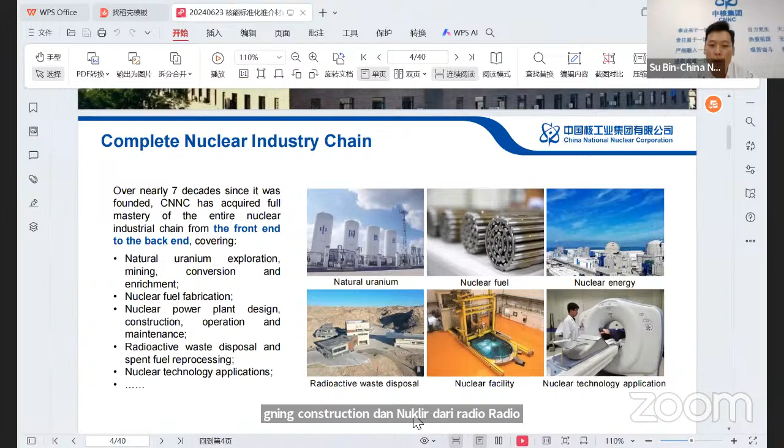For CNNC, as I said, it has a complete nuclear industry chain. Over the nearly 7 decades since it was founded, CNNC has acquired full mastery of the entire nuclear industry chain, from the front end to the back end, which covers natural uranium exploration, mining, conversion, and enrichment. Second is nuclear fuel fabrication and nuclear power plant designing, construction, operation, and maintenance. And also nuclear radioactive waste disposal, spent fuel reprocessing, and nuclear technology application in different areas.

For nuclear power development, as we stand as the first rank of nuclear group, CNNC has constructed many types of reactors from generation 2 to generation 4, including CNP300, CNP600, CNP1000, and HPR1000. You can also see the ACP100 and HTR-PM.

And the AP1000 - actually AP1000 is from American, it's Westinghouse, and we have also imported the American power plant, but now it's in China. It is still under construction.

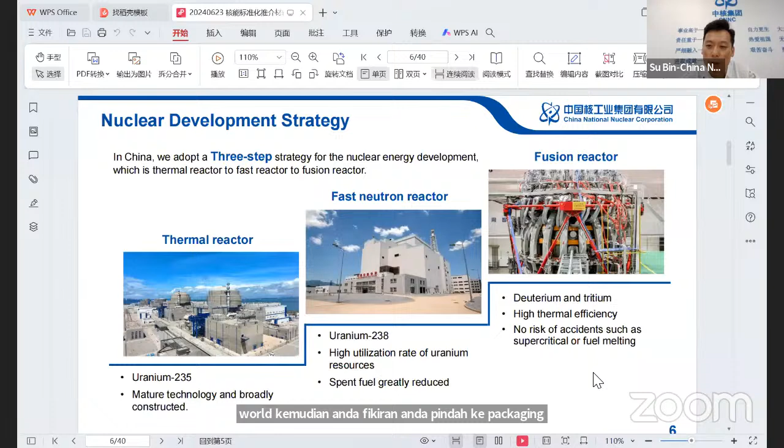Now come to CNOS. CNOS was founded on April 25th, 1983 in China, called China National Nuclear Corporation Overseas Limited, a wholly owned subsidiary of CNNC. It's the leading and designated platform specialized in overseas market development of a complete nuclear industry chain.

For CNOS, we can provide integrated solutions based on the nuclear industry chain of CNC. CNOS can provide life-cycle integrated solutions for overseas NPP. As you can see, CNOS is a leader and overseas EPC contractor, for both nuclear power and research reactors.

Under the leadership of CNNC, we have CNPE, an overall designer. We also have a supply company called CNEIC. After that, we have a specialized company for nuclear construction called CNEC. We also have an NSSS design company called NPIC, and our specialized operator and O&M services for nuclear power plants, called CNNP.

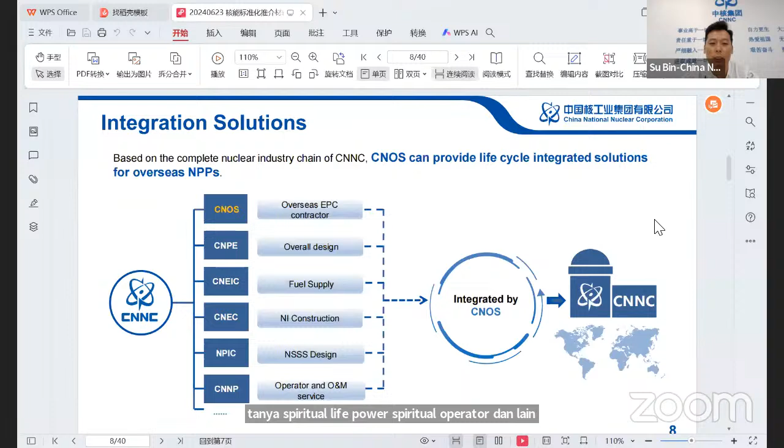Now I would like to share the overseas projects. Over the last 40 years, CNOS has successfully exported one research reactor to Algeria and 6 nuclear power units to Pakistan. We are also jointly building, with Pakistan, 6 nuclear power plants.

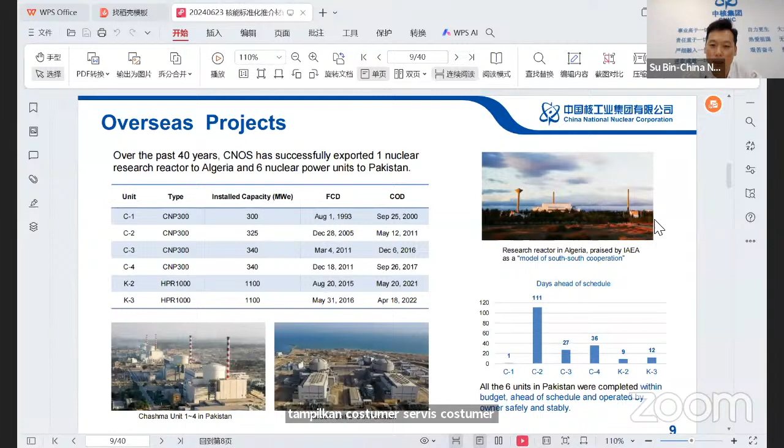Compare with this to see - all 6 units in Pakistan were completed within budget, ahead of schedule, and are operated by the owner safely and stably, meeting power demand with our delivery capacity.

For the design of HPR1000, almost 40 years of experience in design, engineering and operation has endowed us with HPR1000 - a safe, reliable, economic, competitive 1000 megawatt level PWR reactor technology independently developed by CNNC, with a combination of active and passive design concept. HPR1000 has completed the GRSR safety review of IAEA.

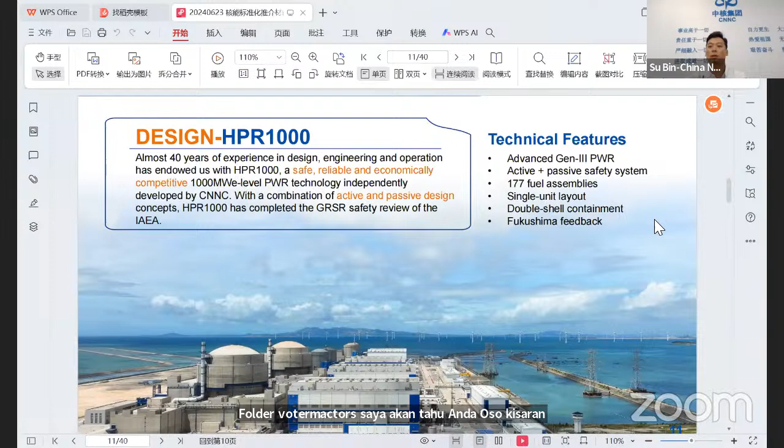For HPR1000, we have several technology features - it can be said to be an advanced generation 3 PWR. We also adopt active and passive safety systems. For the reactor fuel, we have 177 fuel assemblies, and we designed it in a single unit layout. For the reactor, we adopt double shell containment, designed based on Fukushima feedback. We have designed HPR1000 with the most advanced and safe design.

For the plant of HPR, you can see on my right side a picture of the Fuqing nuclear power base in China. We have successfully built the first third generation HPR1000 in Fuqing, called Fuqing Unit 5 and Fuqing Unit 6, in Fujian province of China.

For Fuqing 5-6, the installed capacity is 1161 megawatt. Design life is 60 years. Refueling cycle is 18 months. Availability factor is more than 90%.

For Fuqing 5, FCD was since 2015, and Fuqing 6 also in the same year. COD for Fuqing 5 was 2021, and Fuqing 6 in 2022. The construction period of Fuqing 5 is 68.7 months, and Fuqing 6 is 75 months.

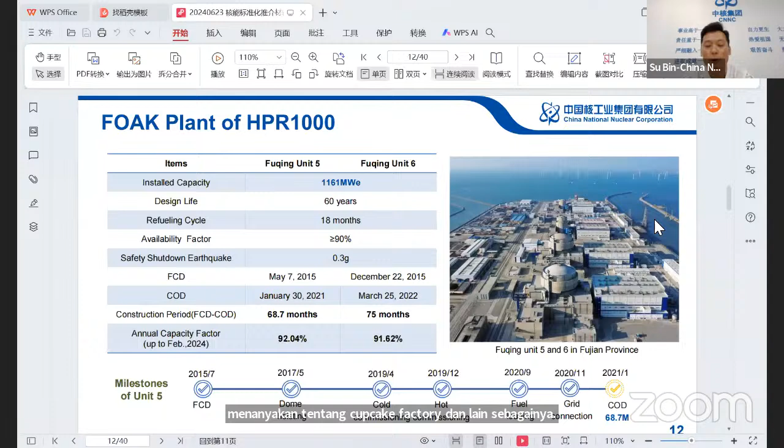The annual capacity factor of Fuqing 5 is 92.04, and Fuqing 6 is 91.62. You can see all the milestones of Fuqing 5 nuclear power plant in China.

After Fuqing 5, we have built another 2 nuclear power units which also adopt the same technology, HPR1000. Based on Fuqing 5 and 6, we have optimized our design and cost. For Zhangzhou Unit 1 and Zhangzhou Unit 2, we have improved installed capacity up to 1212 megawatt, design life is 60 years, and the refueling cycle is 18 months.

FCD time is 2019, and planned COD time is by the end of 2024. Zhangzhou Unit 2 will achieve commercial operation by October 2025. The construction period for both units has been reduced to 62 months.

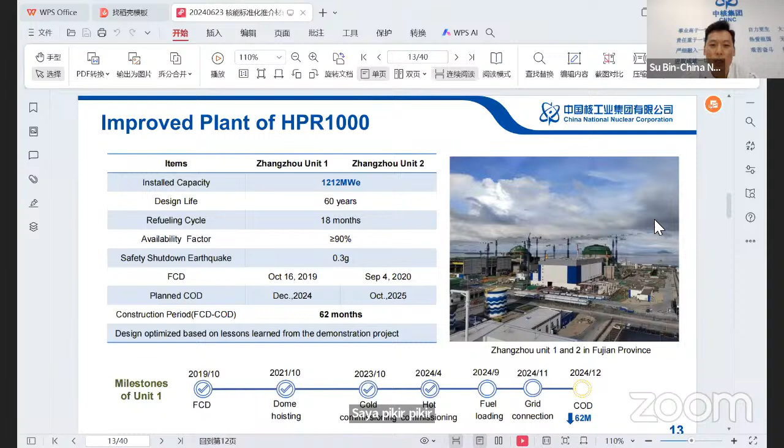Now we'll come to the overseas plants of HPR1000. The first 2 overseas HPR1000 units have come into operation in Karachi, Pakistan. And the EPC contract for another 2 HPR1000 units has been signed.

One is in Pakistan, in Chashma nuclear base, which we call the C5 project, with a design capacity of 1200 megawatt. Another one is in Argentina, Atucha Unit 3, and we signed a contract with Argentina on February 1st, 2022.

With overseas HPR1000 information, for 1 unit construction period we require 66 months, and for double units we require 87 months of construction period, from FCD to COD.

The unit capital cost of 1 unit of HPR1000 is around 4,500 to 5,500 US dollars per kilowatt. For 2 units, we can slightly reduce the cost, which comes to 4,000 to 5,000 US dollars.

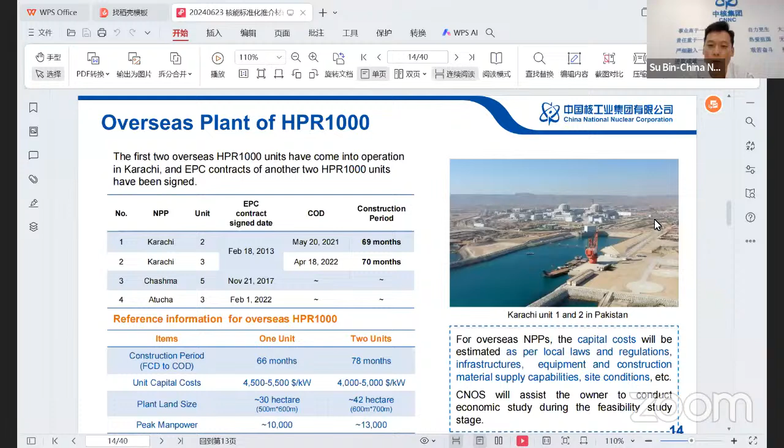Now we'll come to the design of HTR. The pebble bed modular high temperature gas cooled reactor, which we call HTR-PM, is an advanced nuclear reactor with characteristics of generation 4 nuclear power technology, with independent Chinese intellectual property.

Currently, regarding HTR-PM advanced reactor technology, there is cooperation between Tsinghua University in China and BRIN. Under the support of both governments, Tsinghua University and BRIN have established the HTGR-PM Research Center in BRIN, in Jakarta.

For HTGR technology, we have several features: inherent safety, online refueling, multi-applications, and modular design.

The characteristics of HTGR-PM: it's a helium cooled, graphite moderated reactor with fully ceramic coated particle fuel elements. It's featured with low power density, controlled reactivity, and confinement of radioactive material.

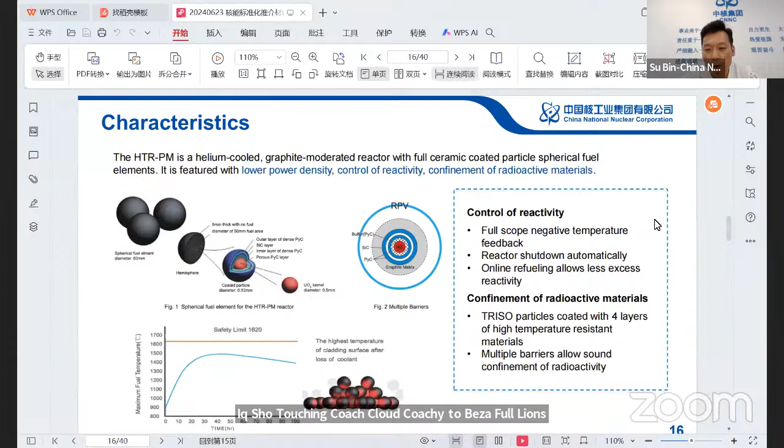For confinement of radioactive material, TRISO particles are coated with 4 layers of high temperature resistant material. Multiple barriers allow sound confinement of radioactive material.

For the plant of HTR-PM: in China, we have built the first fourth generation nuclear power plant, HTR-PM, our demonstration plant. This first demonstration plant in the world has successfully entered commercial operation in Shandong province, China. The installed capacity is 210 megawatt.

Coolant helium pressure is 7 MPa. Reactor outlet temperature is 750. Main steam temperature and pressure is 541 and 13.9 MPa. Design life is also 60 years.

Applied for power generation, we got FCD from 2012 and commercial operation in 2023, with a construction period of 132 months.

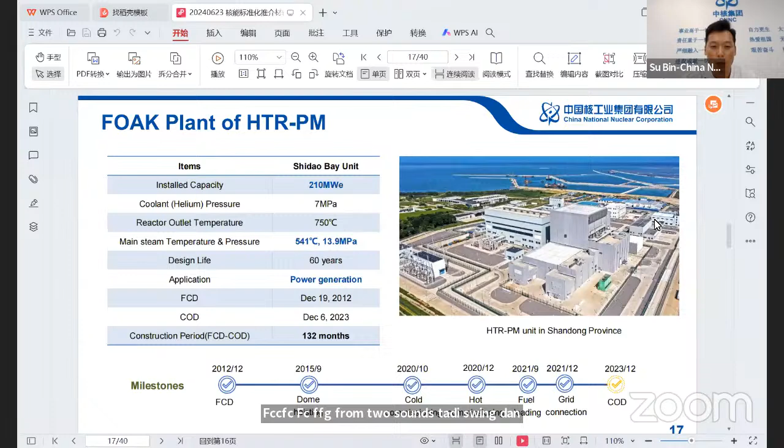And petrochemical comes to the HTR-PM600. We have successfully linked petrochemical couplings. The demonstration project, Lianyungang Nuclear Steam Supply Project, for petrochemical couplings, plans to supply industrial steam to the Lianyungang petrochemical industry base. We can see that the project plans four units at HPR-1000 plus 2

HTR-PM600. In phase 1, we plan to construct 2 HPR-1000 units plus 1 unit HTR-PM600S. The phase 1 steam supply is 4,000 tons per hour, and thermal utilization rate is more than 85%. Planned FCD is December 2024. You can see this is all detailed information.

For the HTR plan, single unit construction time is 48 months, and the unit cost is 6,000 to 7,000 US dollars per kilowatt. For the HTR-PM600, construction period is 60 months, and the cost compared with HTR-PM is slightly reduced, coming to 5,000 to 6,000 US dollars per kilowatt.

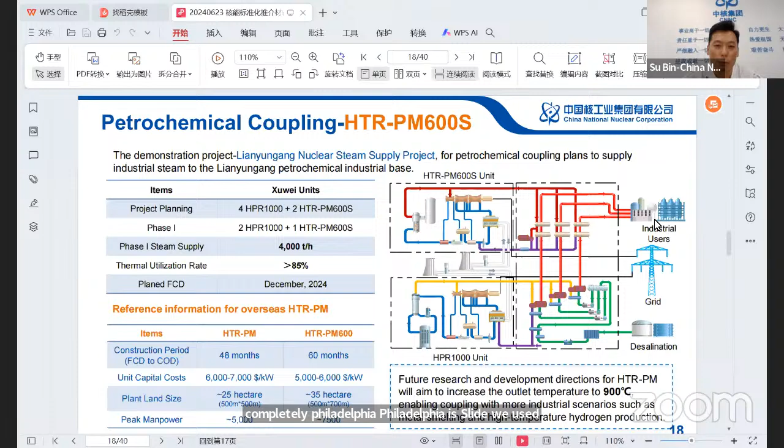And for the design, now we are coming to the ACP100. It's a small modular reactor design. The ACP100 is a new generation of small and elegant NPP developed based on inherent mature technology, aimed at broader users and featuring easy connection to

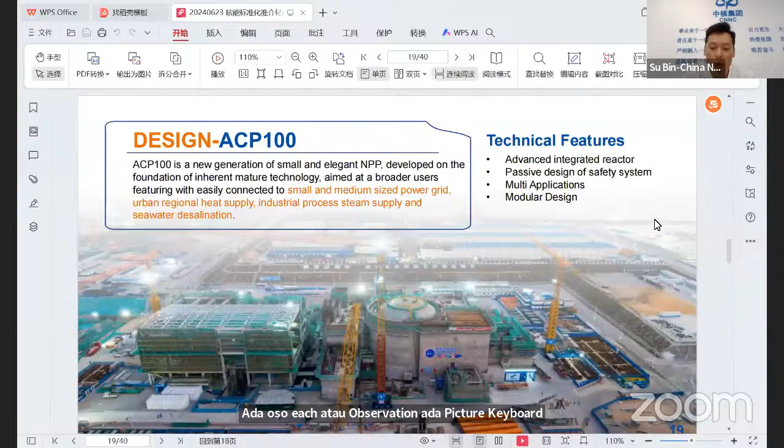small and medium-size power grids, urban regional heating supply, industry process steam supply, and seawater desalination. For the ACP100, we have several technical features: advanced integrated reactor design, passive safety system, multiple applications, and it also adopts modular design. The picture shows the first SMR reactor developed,

under construction in China, Hainan province. The characteristics of ACP100 are adopting integrated reactor design technology along with a passive safety system, incorporating comprehensive measures for preventing and mitigating severe accidents. For the SMR integrated design, the canned pumps are connected to the reactor pressure vessel, once-through steam generation, and integrated reactor internals design.

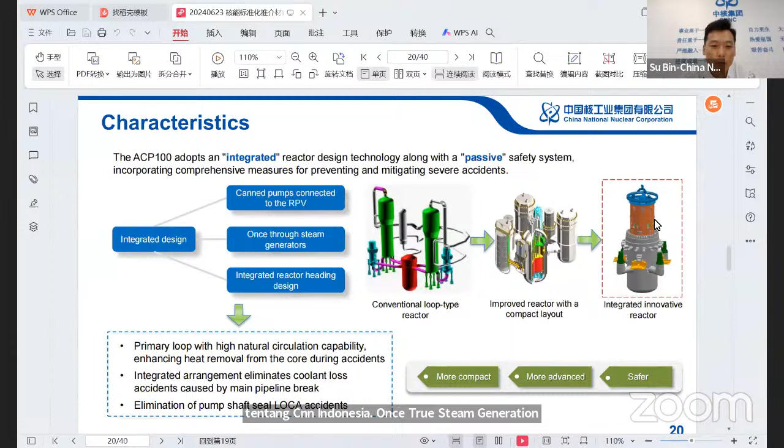For the ACP100 plant constructed in China, located in Hainan province: installed capacity is 125 MW, design life is 60 years, refueling cycle is 24 months, availability factor is more than 90%, safe shutdown earthquake is 0.3G, construction start was 2021, and planned COD is end of 2025. Construction time is 53.5 months.

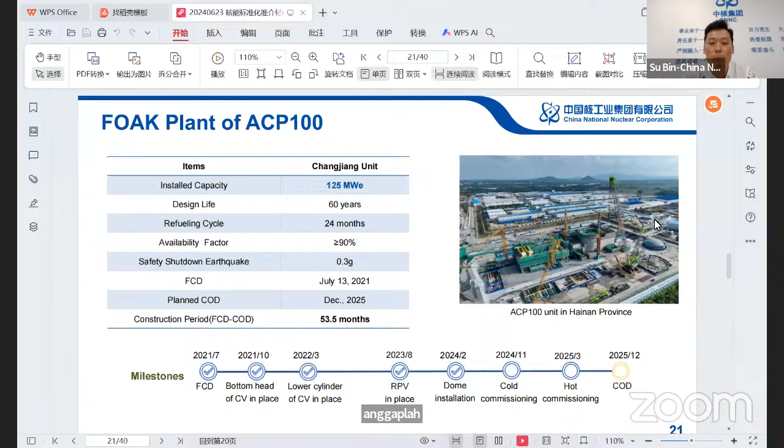This is the multi-application. ACP100 is aimed at broader users, featuring easy connection to small and medium-sized power grids, heating supply, industry process steam supply, seawater desalination, and floating nuclear power. Referring to information from overseas

ACP100: for single units, the construction period is probably around 48 months, and for 2 units, 60 months. The cost of ACP100 for a single unit is 8,000 to 10,000 US dollars per kilowatt. For 2 units, the cost is reduced, coming to 6,000 to 8,000 US dollars.

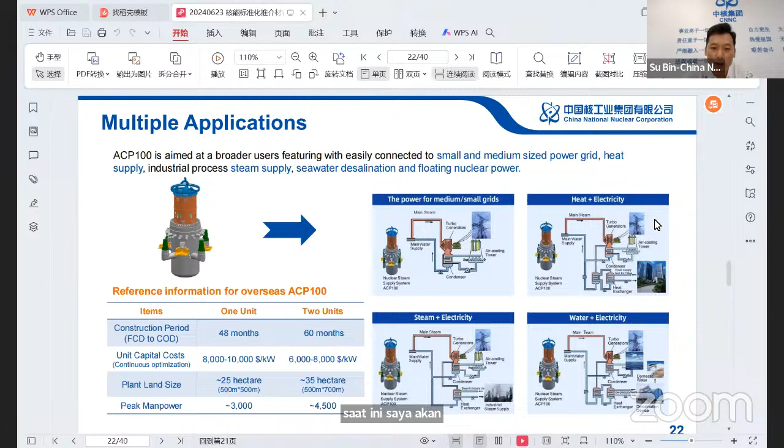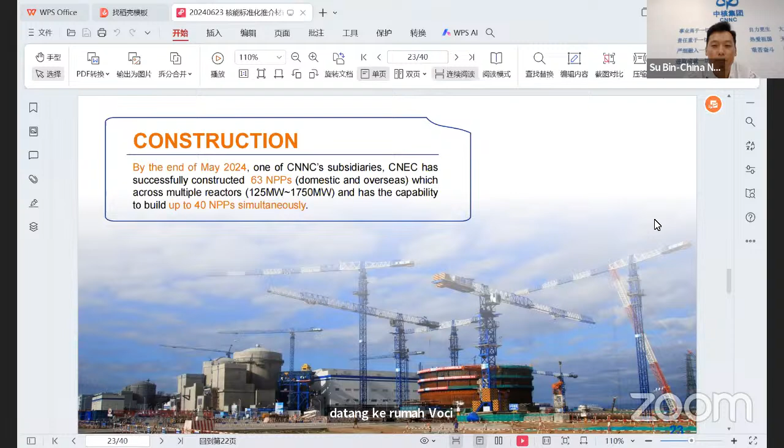And the construction status of CNNC, by the end of May 2024, CNNC's subsidiary CNEC has successfully constructed 63 NPPs, including domestic in China and overseas, across multiple reactors from 125 megawatts to 1750 megawatts, and has the capability to build up to 40 NPPs simultaneously. This is the construction capability.

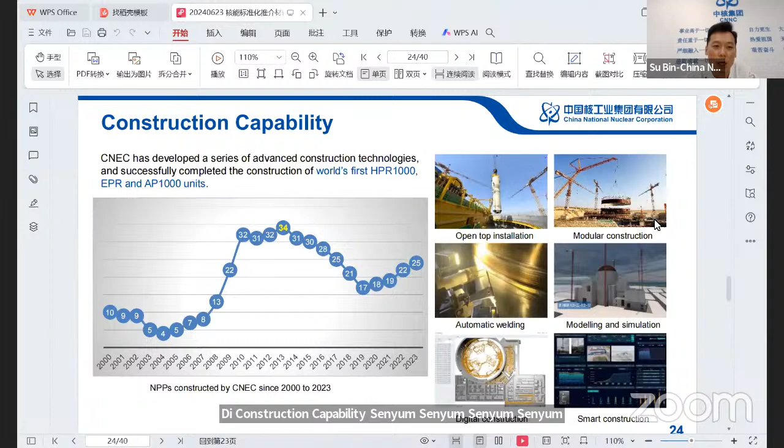CNEC has developed a series of advanced construction technologies and successfully completed construction of the world's first HPR1000 and EPR, and also AP1000.

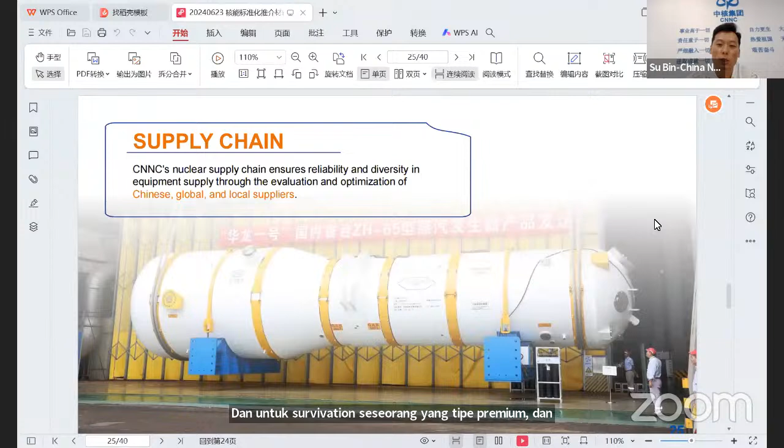For the supply chain, CNNC's nuclear supply chain ensures reliable and diverse equipment supply through evaluation and optimization of China, global, and local suppliers. Resilient supply chain includes three parts: China supply, where qualified suppliers can supply 100% of nuclear power equipment such as reactor pressure vessel, steam generator, pressurizer, coolant pump, primary piping, turbo generator. Global supply, where qualified suppliers can supply coolant pump, DCS, EDG, I&C instruments as per owner's requirements.

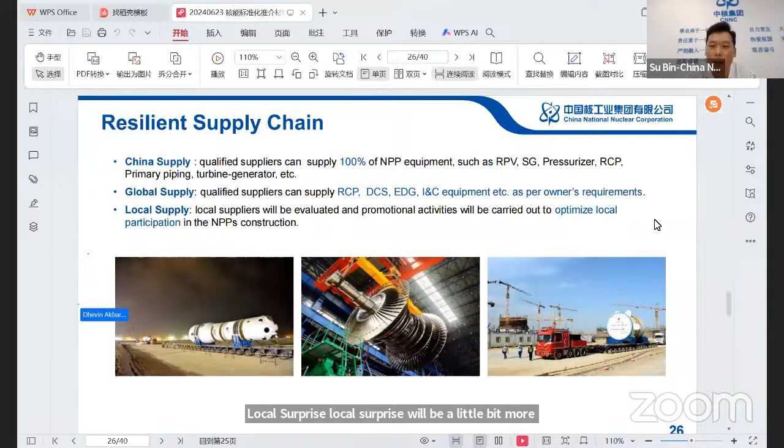Local suppliers will be evaluated, and promotional activities will be carried out to optimize local participation in new NPP construction.

Chinese financial institutions can provide maximum financing support for overseas NPP construction, including concessional loans, preferential buyer's credit, and commercial loans. Financing amount can be up to 85% of the EPC contract, depending on the Chinese export share. Financing terms of ECA facility currently is 20 years, including an 8-year grace period.

Moreover, CNNC can participate in equity investment in the project company according to the owner's requirement. Other financing solutions can also be discussed as per the owner's requirements, such as BOT, and the interest rate will depend on the credit structure and will fluctuate according to the market.

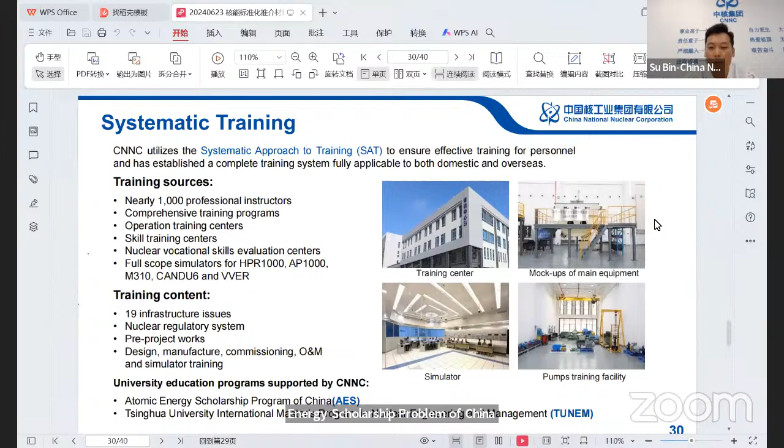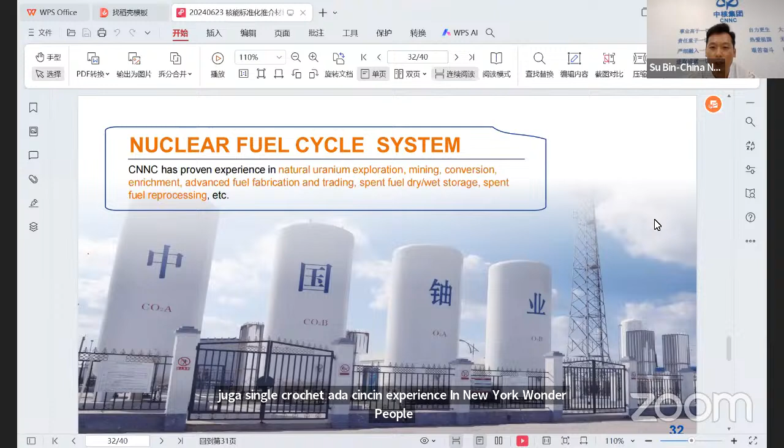And we are guaranteeing your life cycle fuel demand with our fuel cycle system. You can see that CNNC has proven experience in natural uranium exploration, mining, conversion, enrichment, advanced fuel fabrication and trading, spent fuel dry and wet storage, and spent fuel reprocessing. We also can provide uranium exploration, mining, conversion, and enrichment.

For uranium resource exploration, CNNC is equipped with world-class space, airborne, ground, and underground integrated comprehensive exploration capability, and can quickly carry out geological data processing, interpretation, analysis, and evaluation of mineralization geological conditions. For uranium mining, CNNC is also recognized as a global leader in the

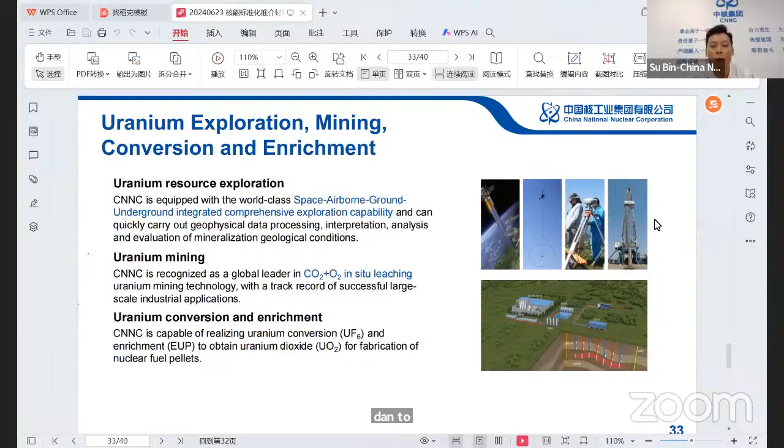in situ leaching uranium mining technology, with a track record of successful large-scale industrial applications. For uranium conversion and enrichment, CNNC is capable of realizing uranium conversion and enrichment to obtain uranium dioxide for the fabrication of nuclear fuel pellets.

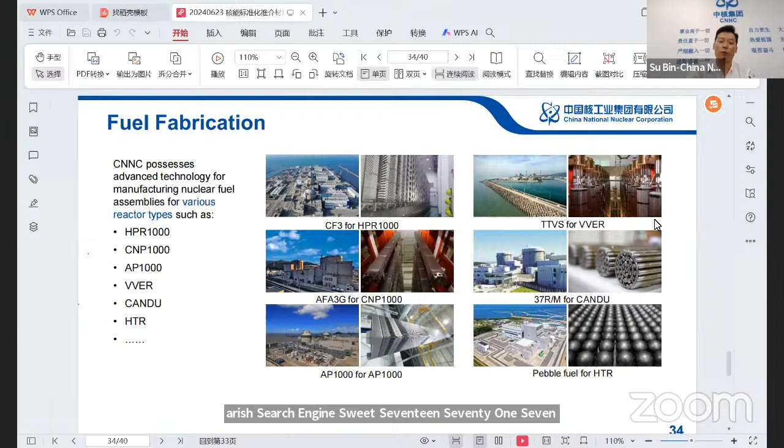For spent fuel, CNNC's spent fuel management is a complex and rigorous process involving multiple stages, each with a specific purpose and technology requirement. By scientifically and reasonably managing spent fuel, radiation risk can be effectively reduced, valuable resources recovered, and environmental impact minimized.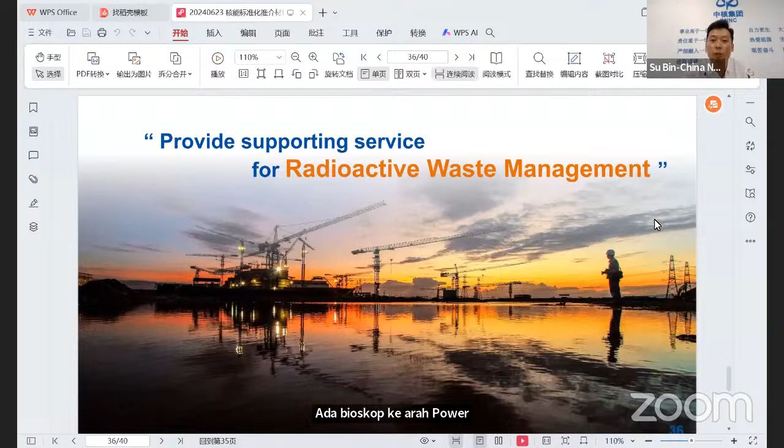And we also can provide supporting services for radioactive waste management. In the area of radioactive waste management, CNNC adopts advanced, proven treatment processes for all types of waste to ensure radioactive waste

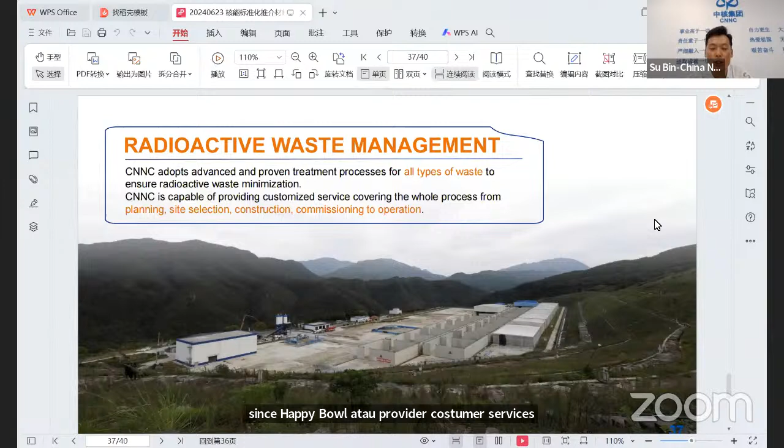minimization, CNNC is capable of providing customized services covering the whole process from planning, site selection, construction, commissioning to operation. So for radioactive waste management, CNNC adopts advanced and proven treatment processes for all kinds of waste to ensure radioactive waste minimization, which covers three areas.

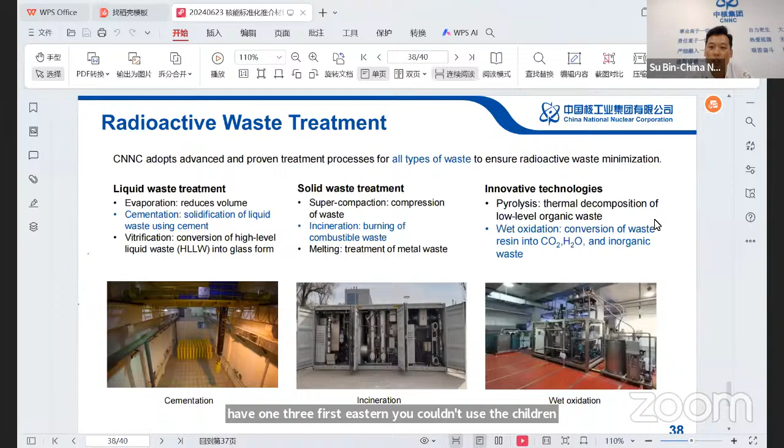First is liquid waste treatment, and also solid waste treatment, and innovative technology. Radioactive waste disposal, CNNC is capable of providing the whole process starting from planning, site selection, construction, commissioning, and operation.

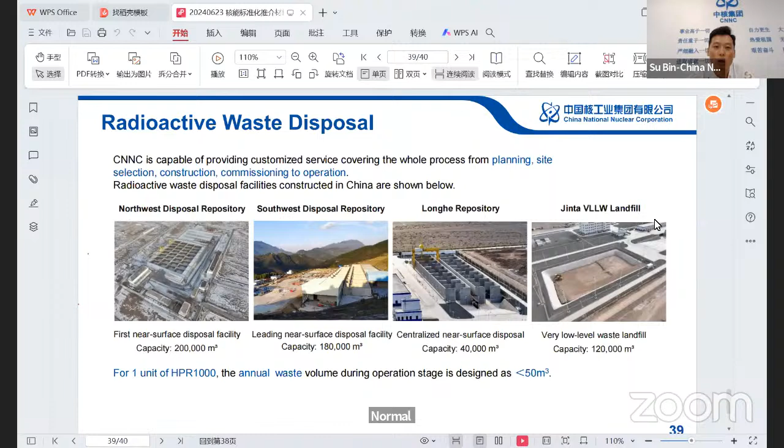And you can see this is all the disposal repository in China. And

with all our nuclear power development experience in China, we have very great confidence to work with our international friends and partners to build the most advanced and safe nuclear power technology in the world, getting green electricity with nuclear power and our integrated solution.

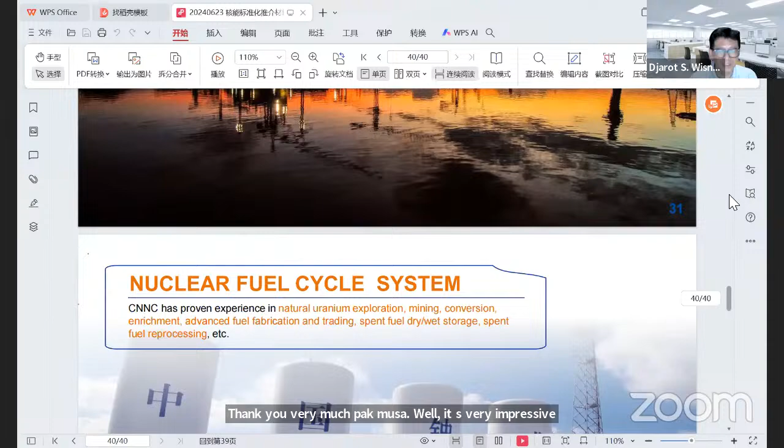Well, it's a very impressive presentation, and I think CNNC is a very busy organization because you construct many NPPs at the same time. So my questions regarding NPP construction: first, I have to explain that Indonesia has a plan to reach net zero emissions in 2060.

One of the solutions can give the contribution using the nuclear power plant. And the National Energy Commission already announced that we will have the first NPP in 2032. It means only 8 years from now. It's a very short time.

But you show us that during construction in Pakistan, you've always been ahead of schedule. It means no delay, almost no problem at all. This is very good information for us. So my question is, maybe the average time from the opening of the project until commissioning or operation of the NPP is around 6 or 7 years. This is my first question.

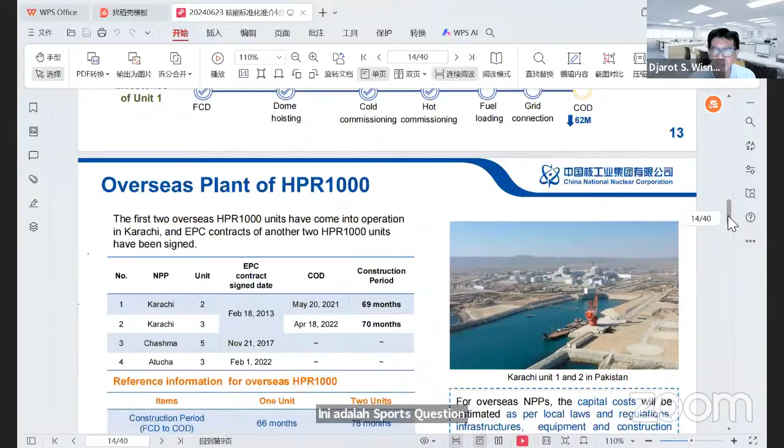The second question: is there any problem, since you have 10 years of experience in Pakistan, with anti-nuclear movements or social-political issues? We find many here. How about the challenges in Pakistan on the construction of NPPs? These are the first two questions from me, and then maybe the audience will ask you.

Okay, thank you very much for your question. We have successfully exported 6 units in Pakistan, and we have cooperated successfully with Pakistan for the last 30 years. You can see for the overseas plants of HPR1000 in Karachi, all units we are building in Pakistan have construction periods ahead of schedule.

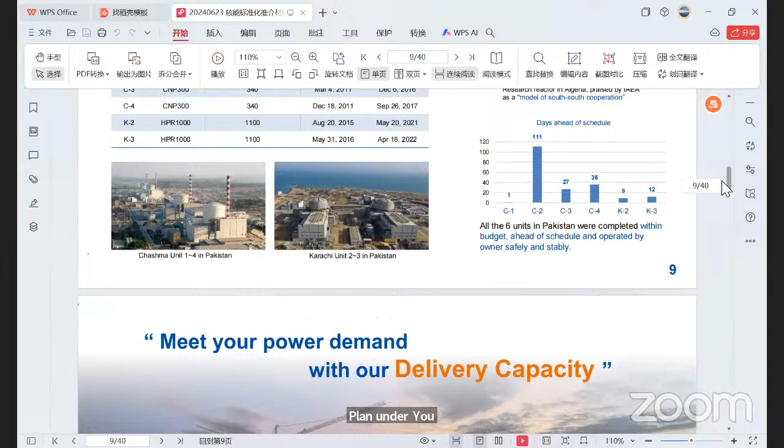There is no delay for any plant, and I can show you that data. For the first unit we built in Pakistan, it was 1 day ahead of schedule, and for the second unit we were advanced almost 3 months, which is 111 days ahead of schedule. For the third unit, we were ahead of schedule by 27 days. For the fourth unit, we were ahead by 36 days.

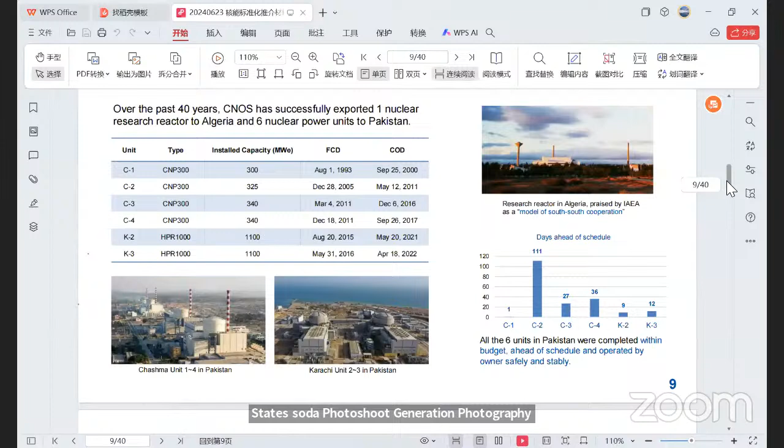For the third generation, which we constructed in Karachi, generation 3 HPR1000, for the K2 unit we were ahead by 9 days. For K3, we were ahead by 12 days in Pakistan.

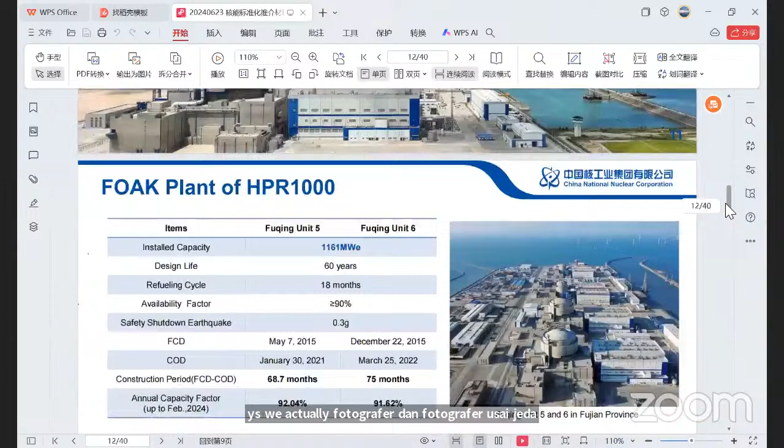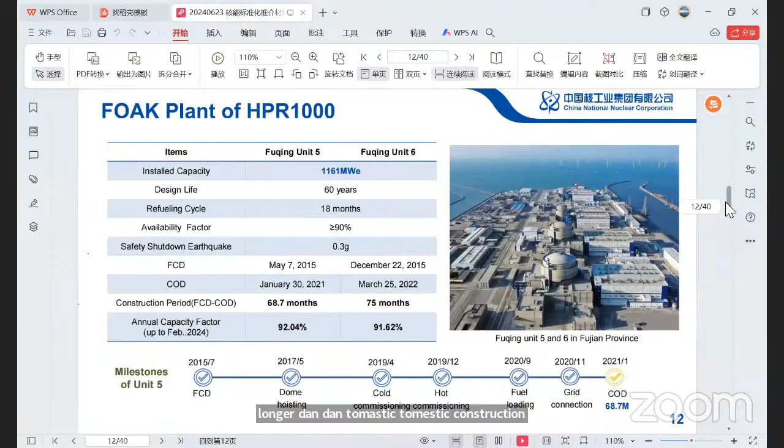For the HPR1000, by our experience, compared with China, the overseas construction period is longer than domestic. The domestic construction period in China is 68 months, and in Pakistan we spent 69 months. There is no much difference, only a few days. For K2 and K3 units, we spent almost 70 months. This is the overseas construction period of HPR1000.

For the challenges, I think it comes from several aspects. First is overseas Pakistan's political stability — I mean government stability, because nuclear power plants have to get government approval. If there is a stable government along with stable policy, then the nuclear power plant will be a success. Otherwise, it will be a great hurdle for the nuclear power plant. And the second is...

...coming from other energy resources like hydro, coal, and renewable. Pakistan adopts a competitive mechanism, so they compare all kinds of power energy resources. Whichever one is most economic, they will select and prefer that.

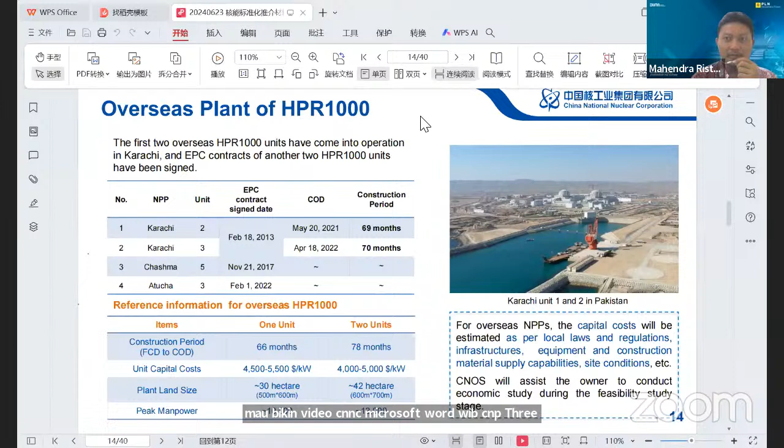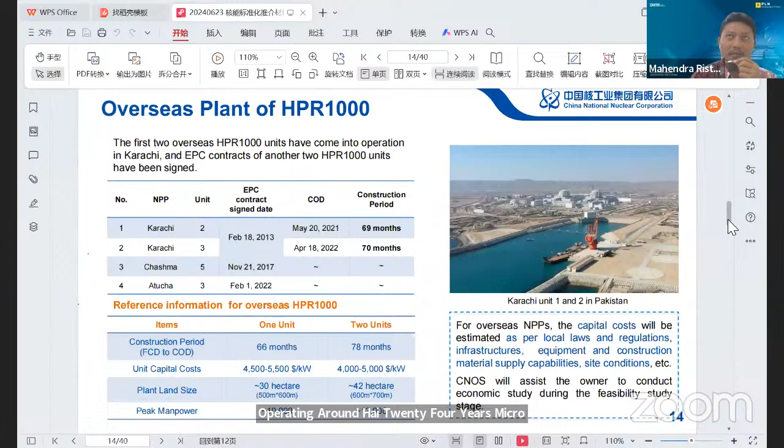My question is about Unit C1, type CNP300 in Pakistan, with COD in 2000 - it has been operating around 24 years. My question is, does the unit still operate well? What type of maintenance should you show us? And the second question is, when will the unit enter the disposal era? We know a power plant by design will be approximately 25 or 30 years until disposal, but nuclear power plants may differ, and we want to know when a nuclear power plant enters the disposal era.

Okay, Pak Musa, will you please answer?

Yeah, okay, I'll first answer the question regarding O&M in Pakistan. Actually, now all six units in Pakistan are running stably and safely. Especially, I have to mention that the C1, C2 units have successfully reached continuous running for 384 days. For K2, K3, in the first quarter of 2024, those units got full marks on record. So Pakistan has a very professional operation team under our training program.

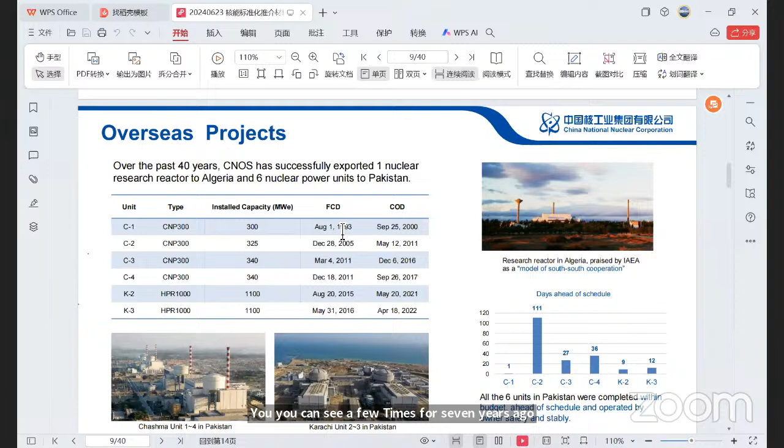Yeah, you can see that C1 to C4 is the second generation, called CNP 300. It's a second generation technology from CNNC. The design life is 40 years.

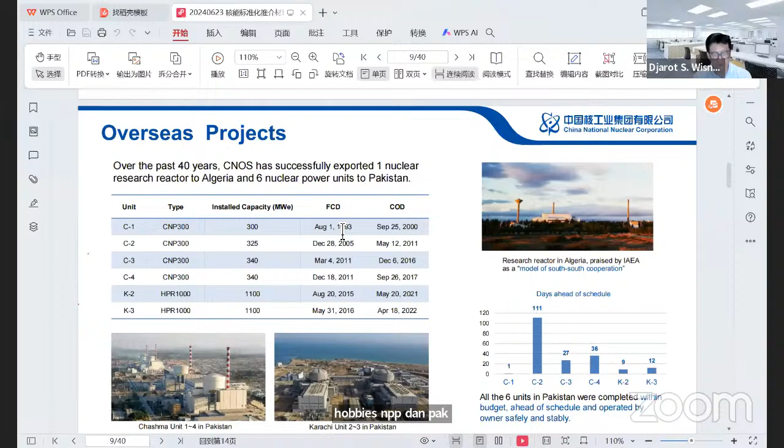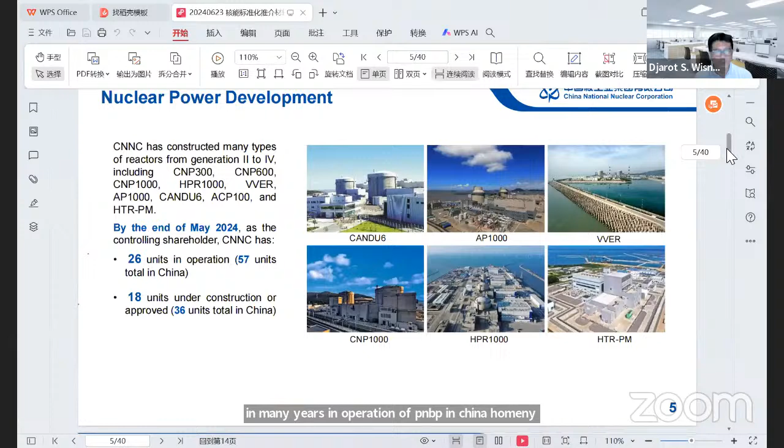Well, this is a good question. Hopefully you can explain it, because you have many NPPs. Pak Erickson asked, in many years of operation of NPPs in China, how much radioactive waste has already been generated, and where is the waste, and where do you want to dispose of it?

Please answer the question. Are you asking how many operating units there are in China? No, it means the quantity of waste already generated by the NPPs in China. Maybe you can answer roughly about the volume.

Actually, for the waste of NPPs, of course, now in China we have 57 units under operation. For the waste of spent fuel, the number of spent fuel, really, I'm sorry, I have no idea. I can get feedback to you later on, because we are not focused on this, I'm not in the government bureau for investigation of this data. I can get back to you later on.

Thank you. There is one question from my partner. So Bugeni, please ask by yourself. Bugeni? Thank you, sorry I cannot open my cam because I'm doing something.

My question is, as you know, the cooperation to build an NPP takes a long period, maybe more than 10 years or more. I want to know, according to your experience when China built the NPP in Pakistan, how does the China company ensure the long-term operational sustainability of the NPP in Pakistan, and what is the most challenging point on that? Thank you.

By the way, whenever they are studying this, they always hold hearings to hear suggestions and ideas from the people of Pakistan. They always have a very friendly environment, and the people support it. Actually, in Pakistan, people support the nuclear power program because they know its importance to the country, to the energy field, and to developing industry. Nuclear power plants don't only generate electricity, they also improve nuclear industry development and create job opportunities for the Pakistani people, giving good benefits to social development as well.

Doctor, I would interrupt you - sure. Your idea, your stance, it's right, but physically, all the people, all the countries will consider that Pakistan has competition with India. Of course, they have competition in every area. But the Pakistan government and also Pakistan Atomic Energy realize the importance of the nuclear power plant and the nuclear power development program, because they have determined it as a strategic project for the country.

So by the way, there is a structural and mechanism difference between Indonesia and Pakistan. Actually, the Pakistan Atomic Energy Commission is a government body to develop, research, construct and operate all the nuclear power plants and nuclear reactors. So they have the power to develop, they have the right to develop, and they don't belong to any government ministries. They belong to the army - above Pakistan Atomic Energy, they belong to the army. So they have very quick decision-making, and very quick recognition of the whole importance of nuclear development. This is the difference between Pakistan and Indonesia.

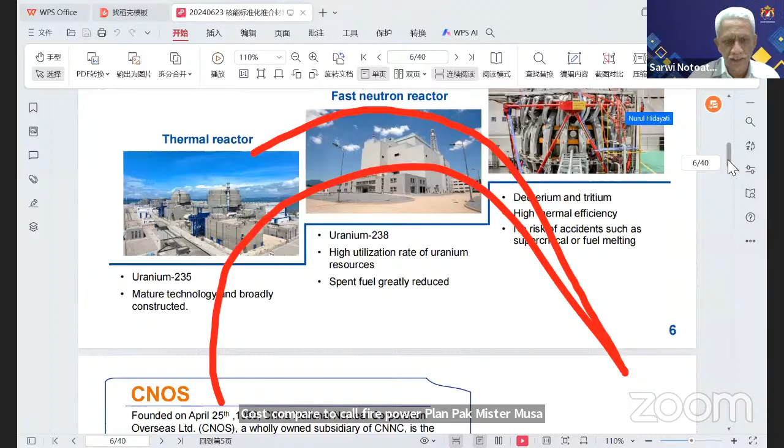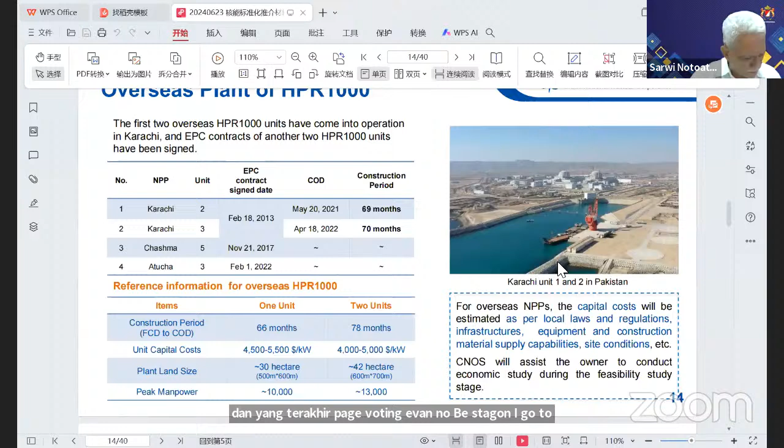My question is regarding the capital cost compared to the coal-fired power plant, Pak Musa. In your slide, page 14, if I'm not mistaken, I got the impression that the capital cost for this nuclear power plant is almost double compared to the coal-fired power plant. Is that correct?

You can say, I think it's not correct. I'll give you an example. In Pakistan, the coal power plant depends on imported coal or local coal. If you compare with local coal, whether in Pakistan or Indonesia, the unit cost is around 2,500 to 3,000 US dollars per kilowatt. And if you come to imported coal, it will be around 3,000 to 4,000, which is almost the same as the nuclear power plant.

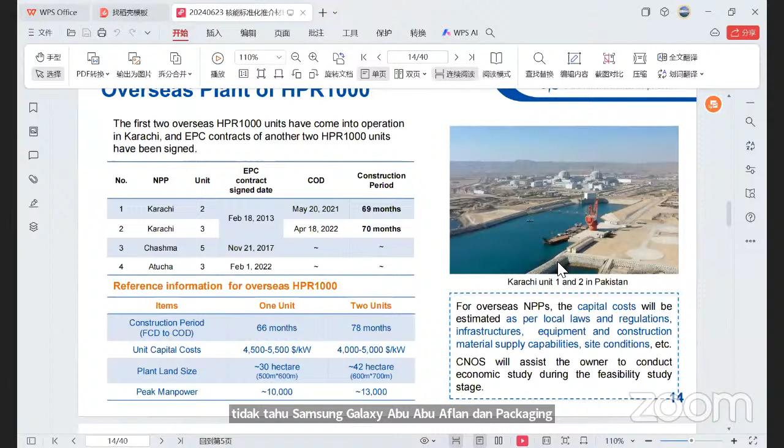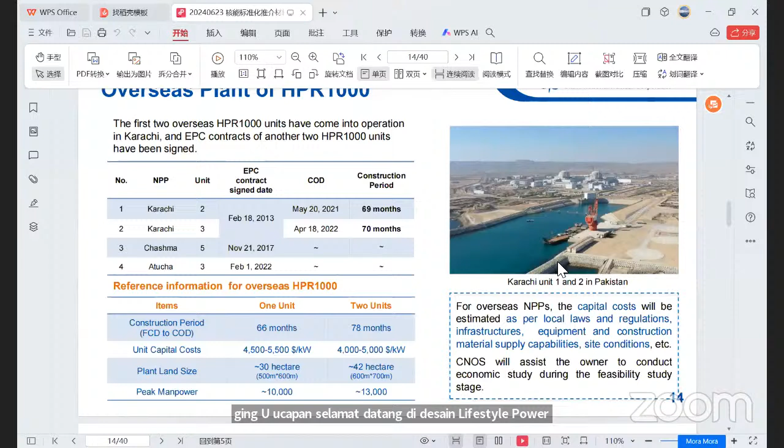But if you look at the long term, coal power plant design life is 30 years, and nuclear power is 60 years. Also, the fuel price - currently due to the Ukraine war, the Russian war, and other international conflicts, the coal price is not stable. Sometimes higher, and especially in these years the coal price is high. But nuclear fuel price is stable. And looking at the long term, the nuclear power plant tariff is much cheaper than coal power plant.

So this is my answer. You can also research different information and data from the internet. For Pakistan, before we started the new project, some ministries also raised the same question, and they said the coal power plant is cheaper than the nuclear power plant.

Actually, it depends. If you compare with local coal, the local coal power plant is cheaper. But if you compare with imported coal, it's almost the same as the nuclear power plant, as I gave you the unit cost. Also, please do not look only at the unit cost. If you consider the long-term design life, average tariff, stability, and O&M cost, the nuclear is much cheaper than the coal power plant.

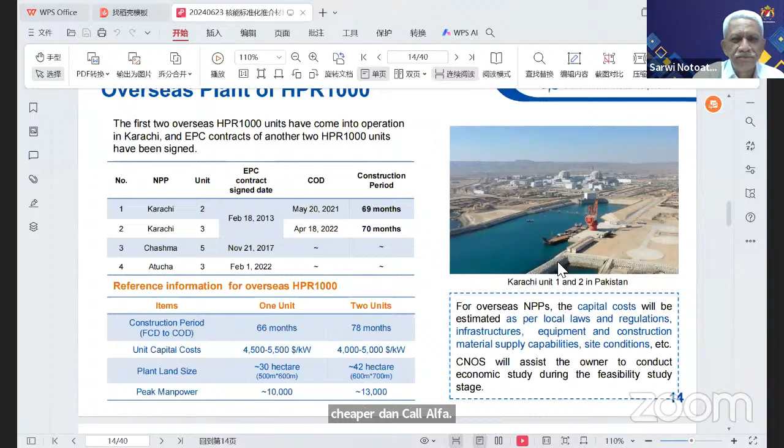Thank you very much. My question is to Pak Musa. Is there any competitor in China besides CNNC? Maybe you have another company that also constructs NPPs, like CGN or something?

Yes, you are right. In China, the companies which have qualified licenses for operation of a nuclear power plant are three companies. One is CNNC, one is CGN, and one is SPIC. Actually, CGN came back 20 years ago. CGN belongs to CNNC - due to economic development, the government had CGN split off from CNNC.

But CGN and SPIC are only nuclear power operators - they only operate nuclear power plants. CNNC is the only nuclear company which owns the whole nuclear industry chain, starting from uranium mining, enrichment, nuclear power plant construction, operation, and decommissioning, and also the fuel and back-end process, which is all owned by CNNC. For SPIC and CGN, they are nuclear power operators, and their nuclear power plant construction is also done by the CNNC team, and their fuel is also supplied by CNNC.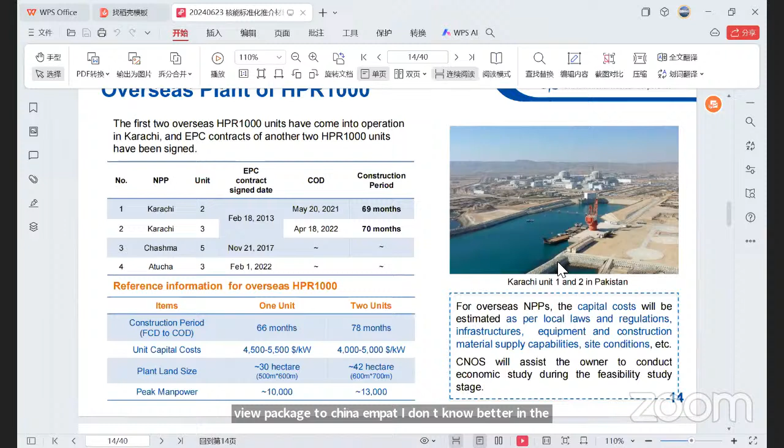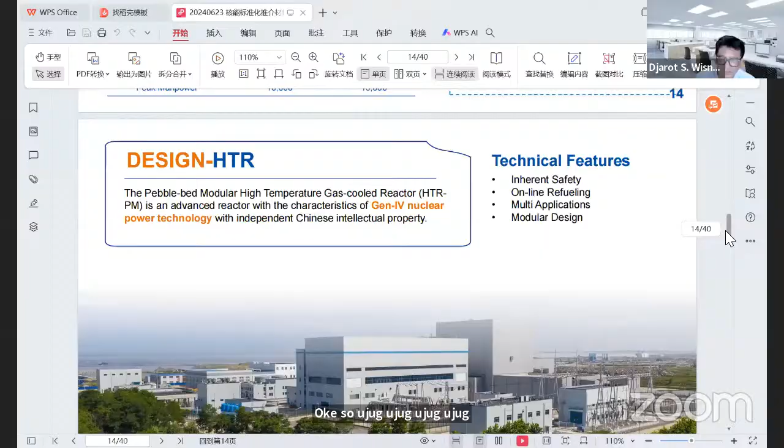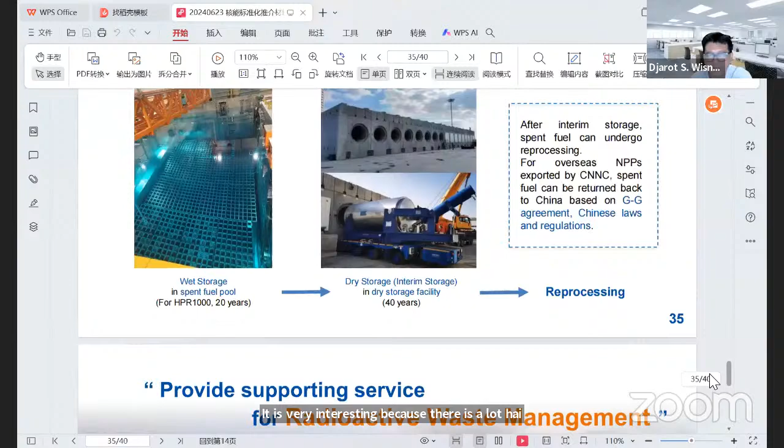Isn't it? I'm not sure it is currently allowed - in Pakistan, as by Chinese government law, we are not allowed to bring spent fuel back to China. But I don't know whether in the future there may be a possibility - it depends on the situation. Okay, so would you please show us page 35? It's very interesting. This one: after interim storage, spent fuel can undergo reprocessing for overseas NPPs exported by CNNC. Spent fuel can be returned back to China based on the agreement.

After interim storage, the spent fuel can undergo reprocessing. For overseas NPPs exported by CNNC, spent fuel can be returned back to China based on the G2G agreement, Chinese law and regulation. The condition of return of spent fuel is that it must get interim storage, and then spent fuel can undergo reprocessing.

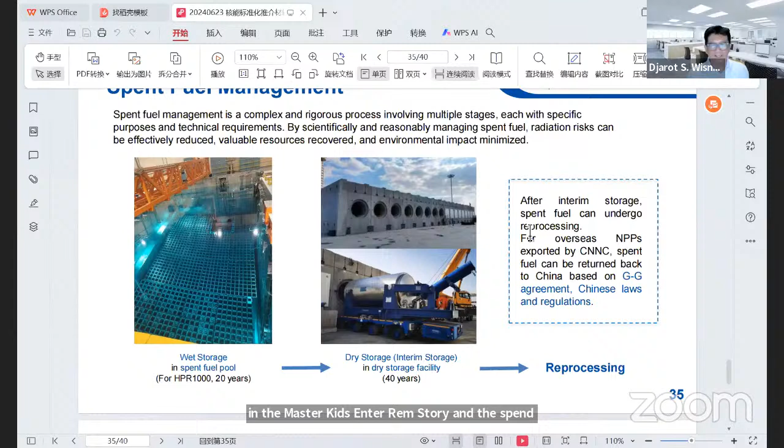It means that if we want to reprocess our spent fuel, if you have the NPP, we can carry the spent fuel to China, you reprocess it, and it can be returned, isn't it? Yeah, but on the condition that we have to reprocess that spent fuel. Okay, thank you.

I think the time is almost 5:30, although there are still many questions. Later on I will send you some questions that I cannot read now. But anyway, if you have any closing remarks about your presentation today, maybe some optimistic views of the future cooperation between Indonesia and China, please.

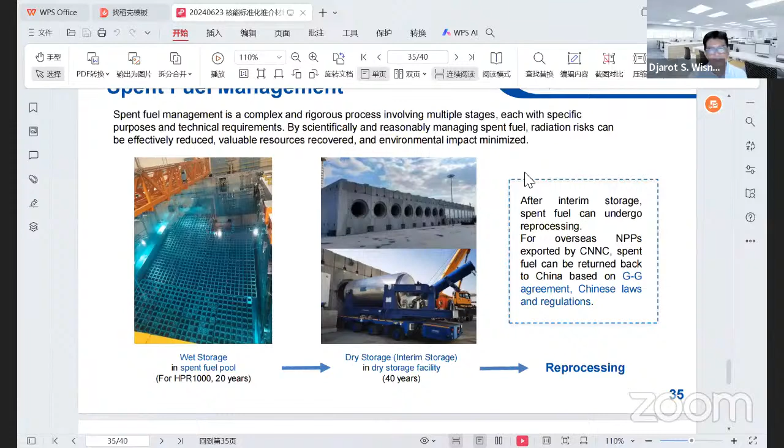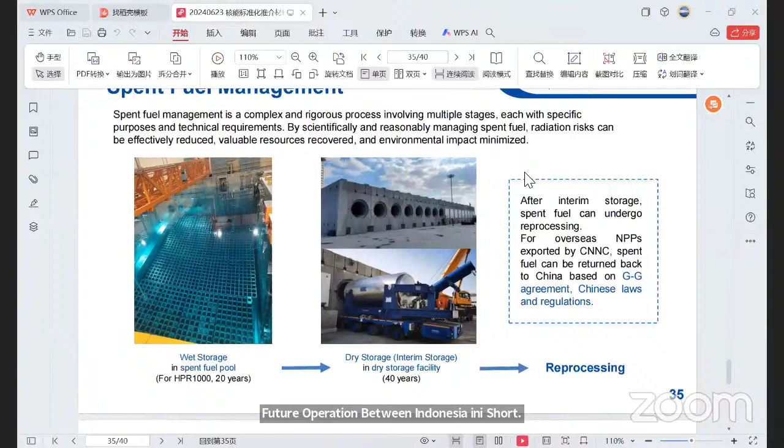Yes, all doctors and dear friends, I have to emphasize regarding the cost and the Chinese nuclear power technology. Now we are confident in the third generation, fourth generation, and SMR reactors. We are leading the world nuclear industry. For the third generation we have a demonstration plant, also an overseas plant, and for HTR-PM reactors we also have a demonstration plant.

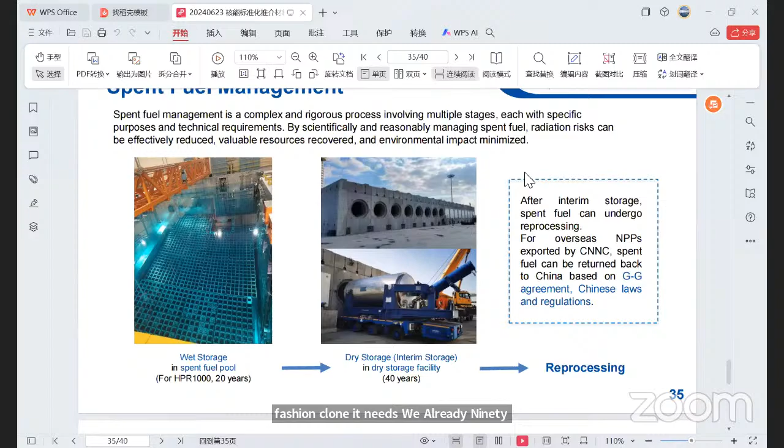For the SMR, we also have a demonstration plant. It means we are leading in nuclear power in the world, and we are confident our technology is most advanced and approved by the IAEA and WANO. In the WANO record, among the top 10 nuclear power operators in the world, China has occupied more than 7 to 8 spots. It means China's nuclear power technology, stability and operation are also at a good advantage.

Also, considering safety, advanced technology and cost economics, CNNC and China's nuclear power plants compared with Russia, Korea, America and France are more capable. Comparing the price with foreign countries, the gap between China and other countries like Russia is 3,000 to 4,000 US dollars per kilowatt.

I would say that Indonesia is a very great country, and you have great motivation to develop the nuclear industry. You also have your own research and a lot of experience in research and other plants and nuclear technology application. I am confident that under our joint efforts, in the future we will have very great, fruitful cooperation results.